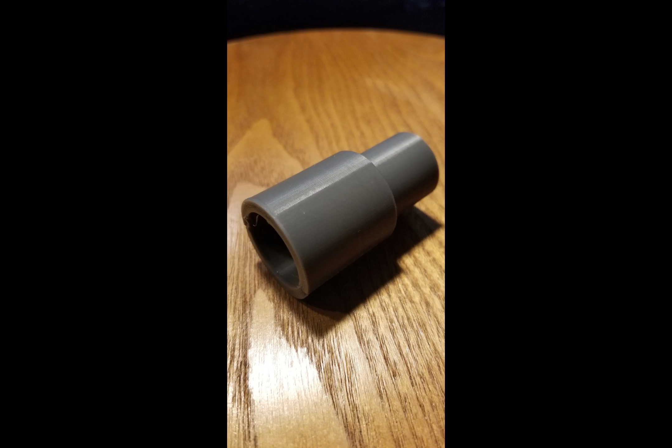Today we have a little different video, and what we're going to do is design and print a part for a CPAP breathing machine. I had a friend that dropped it and broke the end off, so his tube doesn't fit in the top of the machine anymore. We're going to make him a new one.

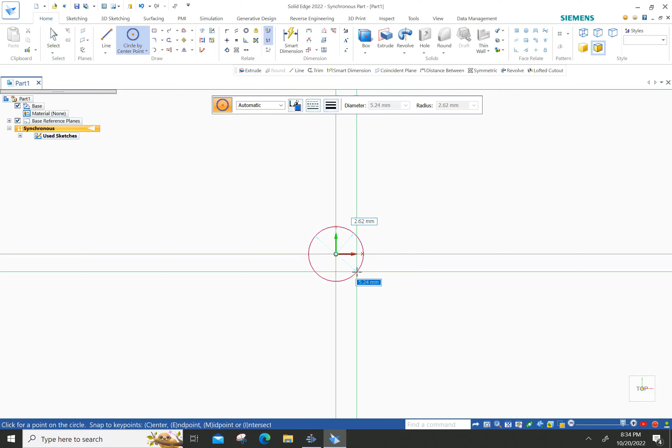We're going to start out by loading Solid Edge, which is a CAD software. What we're going to do is start out by making a circle. We'll draw a circle 28.9 millimeters, and all these are going to be in millimeters. So put in the number, and there it is.

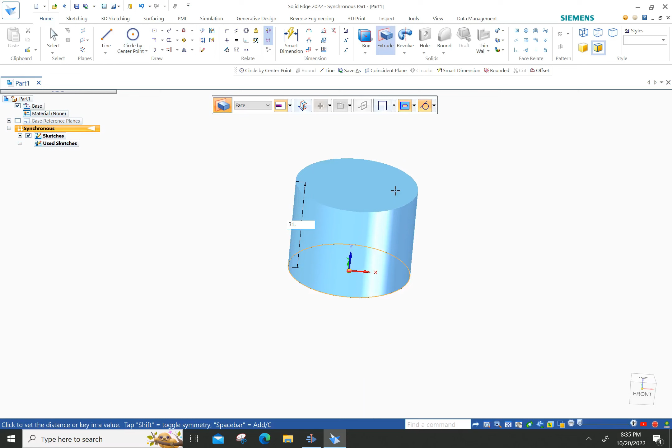That will be the bottom of our part. Now we want to extrude or stretch that part, and we want to stretch it to 31.75 millimeters. There it is.

That's the bottom cylinder. Now we want to build the top cylinder, so we want the top cylinder to start there. That upper cylinder is going to be 21.8 millimeters, so we'll just punch in that number. There it is, and again we want to stretch it, we want to extrude it.

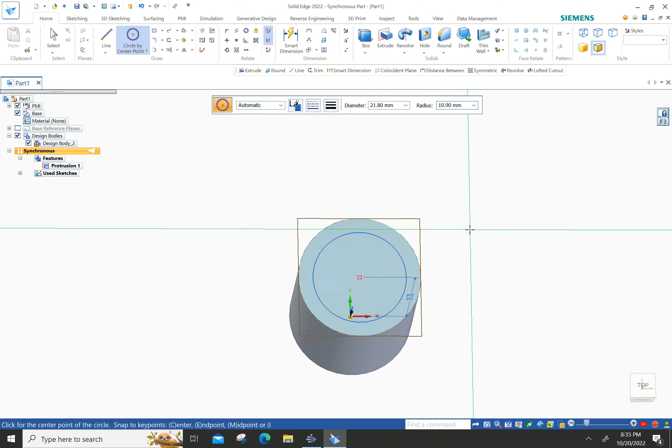So we pick that circle. Pick that circle. Try it again, pick that circle, and bring that up to 21.6 millimeters.

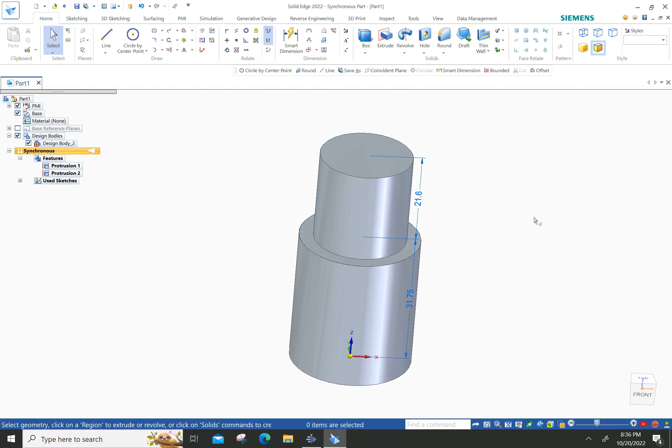Next thing we want to do is put a hole down the center of it, because it has to allow air to go through. So we pick the top of it.

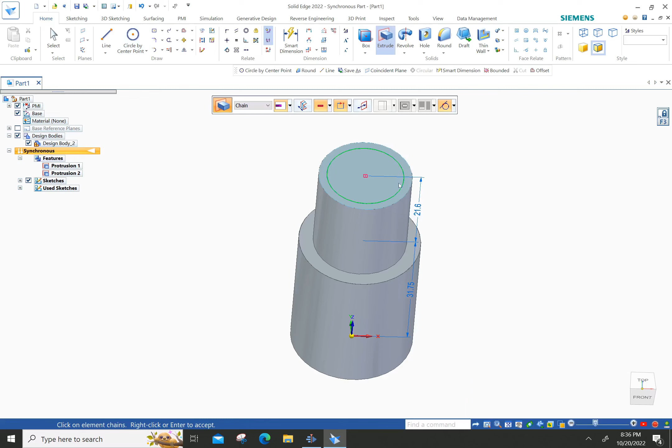We're now going to draw another circle, 18 millimeters. And instead of extruding it, we're going to cut it. So you'll see here in a moment, we change this to cut, pick the circle that we want to cut, and pull it through and down. It will put a hole right in the part.

What we want to do is make this part fit over the broken piece that's there. So we have to make this bottom piece a little bit wider, and the hole a little bit wider too.

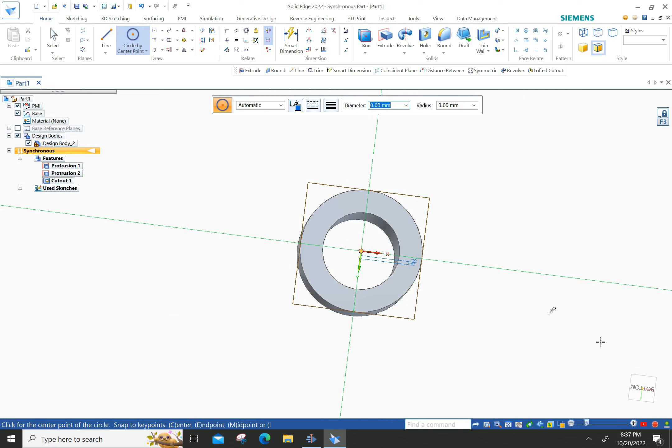So what we'll do is pick the center of the bottom hole. I'm having a little difficulty getting the center. Yep, not going. Let's get a direct-on view, now this will be a whole lot easier. Grab the center, grab the center, there we go.

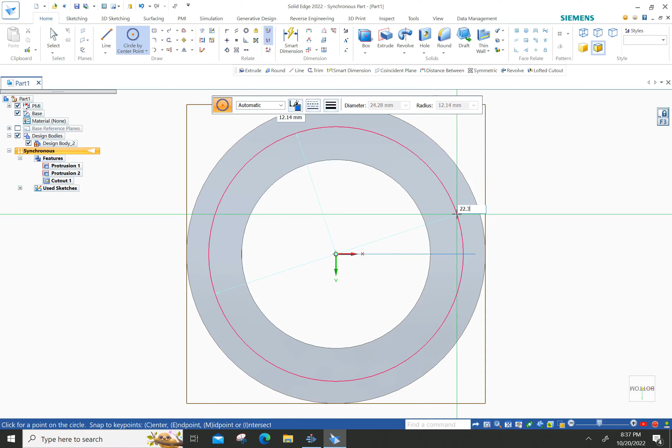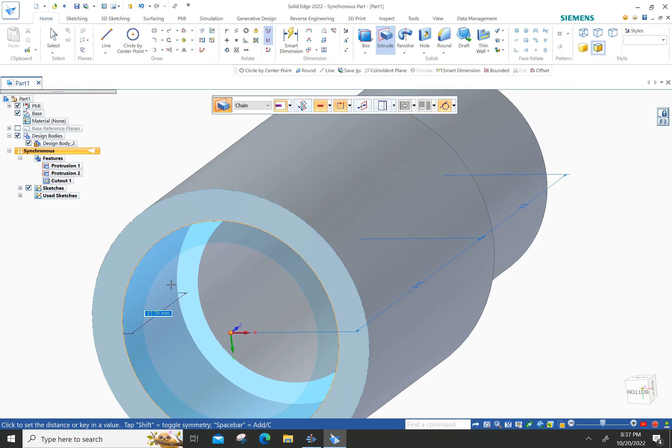Grab the center and make that hole 22.3 millimeters round. Again we want to make that 22.3 millimeters. And again, like with the original hole, we're going to cut this, but cut it to 25 millimeters. So we pick that circle we just made. Oop, forgot to put cut. Now we enter the dimension, 25 millimeters. There we go, there's the part.

So with anything, we don't want real sharp corners. What we're going to do is put a radius, rounding these corners to make them a little softer. And on the bottom cylinder, where the two meet, we're going to put a chamfer, which is an angled piece instead of a round piece.

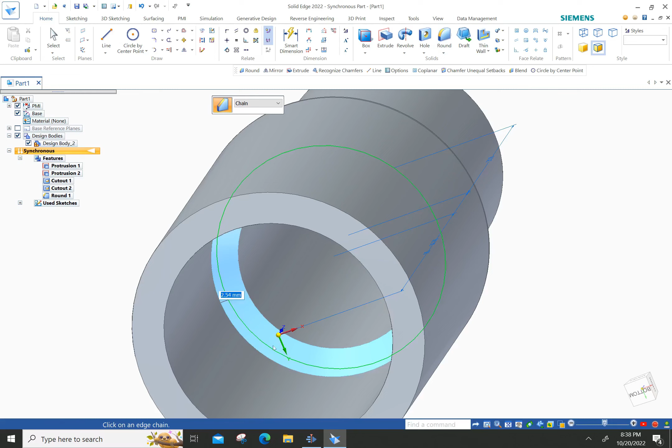There's that. So now the part is completed. We just want to take a quick look at it, make sure it's what we want, and make sure we don't see anything we don't need.

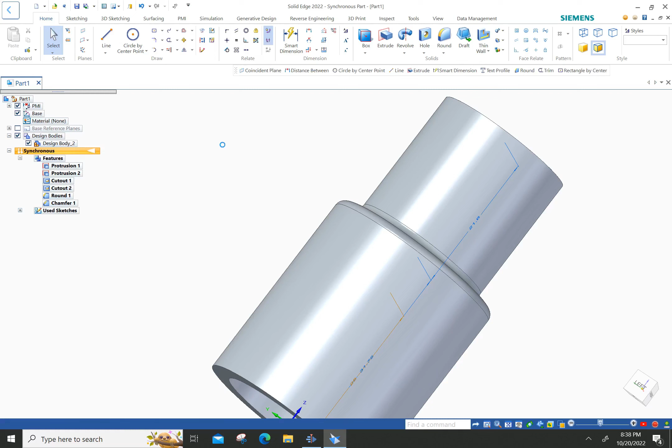Let's go save that part. We go up to the top and do a save as, just like we do any other type of document. And we're going to put CPAP.

Oh, spelled it wrong, but that's okay. We'll know what it is.

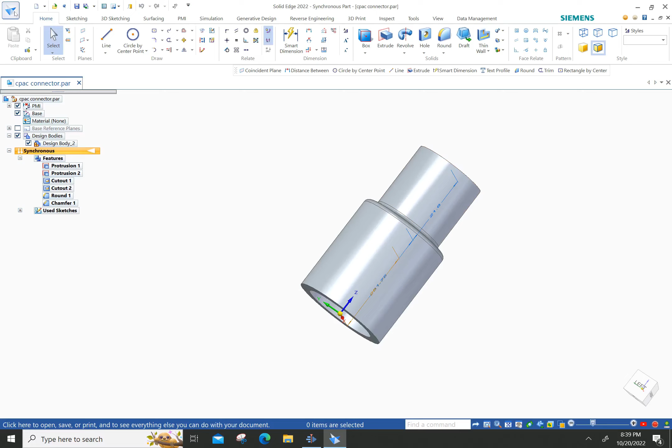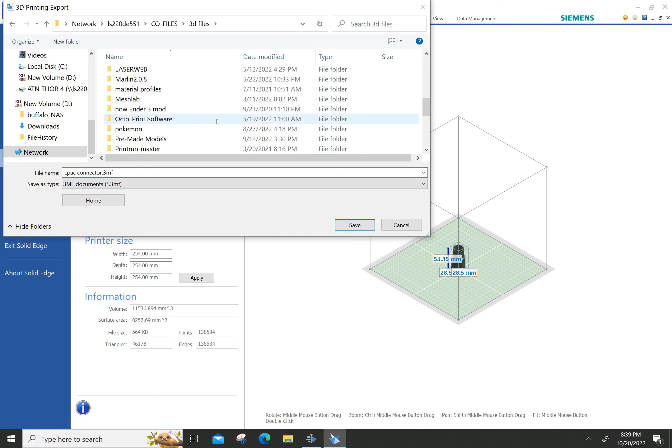There's our part. Next thing we want to do is bring this into the 3D print part of the CAD software, and convert it to a generic 3D print file so that any printer would be able to print it. So we're going to save this as a 3MF, or you could save it as an STL. They're both basically the same, but the 3MF file format has a few more options that are saved.

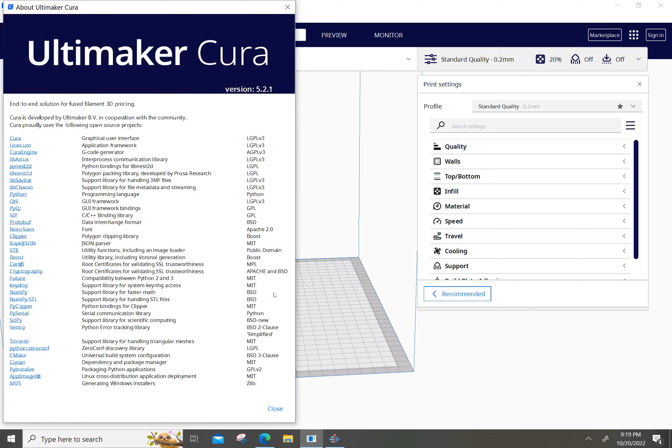After this, we want to load Cura. At the time of this recording, I'm using 5.2.1, the latest version. We're going to take that generic print and specifically make it for our printer. So we pick that part, and you'll see it appear on the left. Drag that to the center - this is a simulation of what my printer would look like, so that's where I want it to print, in the center. Now I want to slice it.

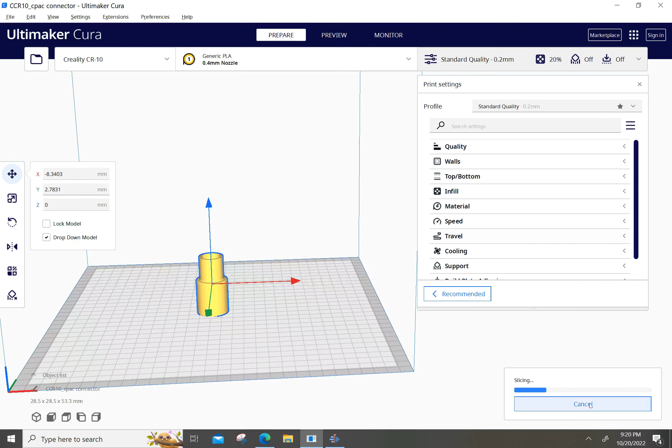What this is going to do is slice it into layers - this part was about 300 layers that my printer can understand and know how to print. So there it is: it's an hour and 22 minutes long, and it's going to use 10 grams of filament.

We want to save this file to my printer, and I've got to change the name. That's not right, it's not going to take that. So let's go change the name to something that Windows likes.

It's our CPAP connector - it works just the same as a CPAP connector. And there it goes, we're going to save this. So now this is saving it so my printer can understand it.

And here's my printer. So we're going to upload it to my printer - there's the G-code file that comes from Cura. It uploads it, and let's scroll up to it. It should be at the very top here. We pick that and put print.

So now it's going to heat up the nozzle and the bed, get the printer ready, and do some level adjustments. It's raising in temperature - you can see it going up. Hang on a second, the bed is heating up.

So now with the magic of time, we're going to take an hour and 22 minute print and speed it up. You can see it's just starting here, putting out a base print, and here we are at about 500 times normal speed, printing that little part. We're about halfway through the bottom cylinder, and we should start to see the top cylinder being printed - there it is right there, coming through, going to the top, and now there it is.